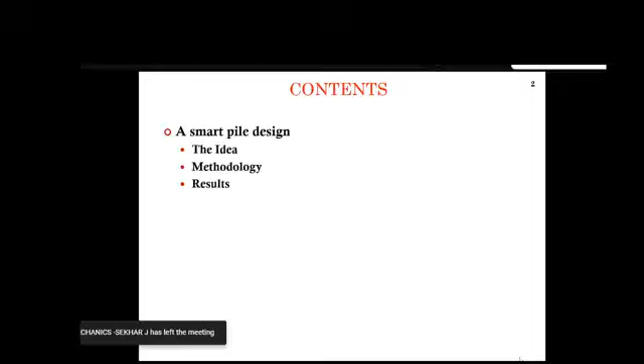Now, going to the topic, these are the contents. I have a smart pile design to propose, the idea, the methodology, the results, and that is part one of my presentation. Now, part two is about stability of finite slopes. It includes stone column supported embankments, a brief study on that, and that is part two.

Before we go into the detailed technical things, I've always found that in FDP workshops, at least the ones that I've presented or been a part of, this will be the expectation, right? You'll have to sit through for, let's say, 1.5 hours. But what really happens would be like this, right? After maybe 45 minutes, we all lose our concentration.

So this is a difference which I've seen during the usual FDPs, the expectations and the realities. Much worse case here, right? If it's an afternoon session, you can expect this. I hope I'm not as boring as I used to be earlier. But what really happens in the online platform could be this, right? When you have the Google Meet with video, you'll be like this. And when you have the Google Meet with audio, you can switch over the mic and the video, and go to sleep. So I'll try to understand that. It's bound to happen even to me, so I can try to understand that.

Let's see what happens now. When the organizers, Nisha ma'am and others, proposed the name of the FDP as smart civil engineering practices to meet the contemporary issues, I was thinking, what is smart, right? What do you really mean by a smart solution?

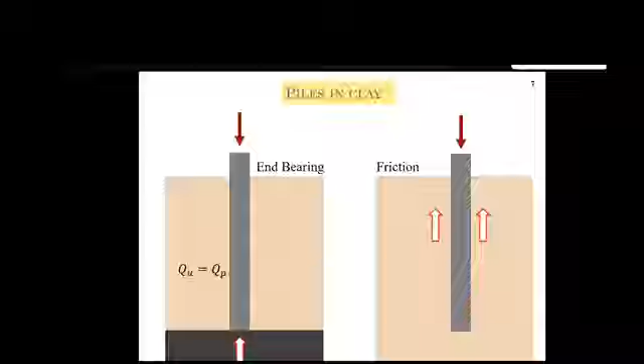Whereas you have skin friction, or friction piles in clay, where you don't expect rock beneath. You'd be forced to install the pile in a clay soil profile where you can't expect rock presence, so you design the pile so that the entire vertical load is taken by skin friction. That's what we call a friction pile. Obviously, there's no completely friction pile or completely end bearing pile - these are all theoretical concepts.

In end bearing piles, QU is equal to QP, QU being the ultimate load and QP being the tip resistance. Whereas in skin friction, QU is equal to QS, meaning the entire vertical load applied onto the pile is taken by the skin friction.

The static method is a theoretical method used to estimate load carrying capacity, where the ultimate failure load QU is the sum of QP and QS. Let's say you have a pile of length L acted upon by QU. That QU is shared by QS and QP - QU equals QP plus QS, where QP is the end bearing resistance and QS is the skin friction.

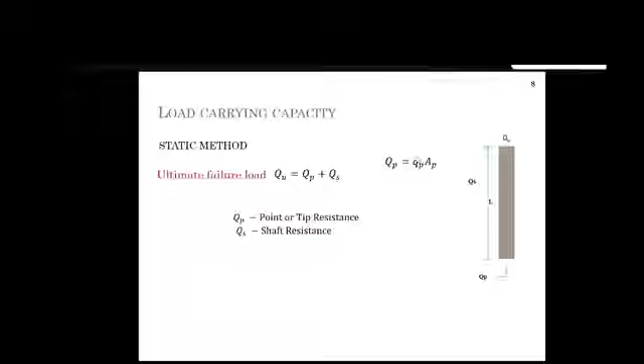QP is the point or tip resistance, and QS is the shaft resistance or skin friction. QP equals small qp multiplied by AP, where small qp is the bearing resistance per unit area, and AP is the cross-sectional area of the pile. QS equals Fs into AS, where Fs is the unit skin friction, possibly due to sand or clay adhesion, and AS is the circumferential area of the pile depending on geometry - for a circular pile it's pi d L, for a square pile it's the perimeter multiplied by the length. So QP is the bearing capacity, AP is the area of the pile tip, Fs is the skin friction or adhesion along the shaft, and AS is the effective circumferential area.

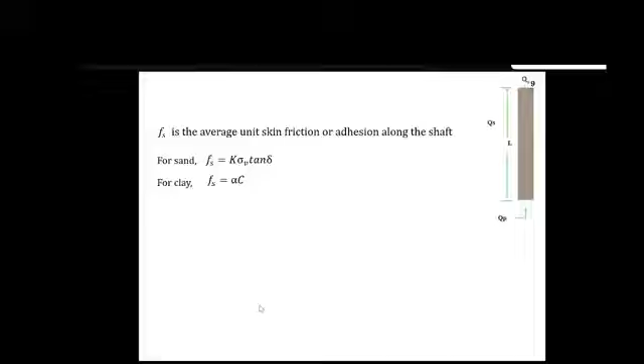For the term Fs, you have two options. If it's sand, Fs equals K into sigma V into tan delta, where K is the lateral earth pressure coefficient, sigma V is the vertical stress, and delta is the angle of interface friction - the internal angle mobilized at the surface between the pile and the soil. When it comes to clay, Fs equals alpha into C, where C is the effective cohesion and alpha is the adhesion factor. So: alpha is the adhesion factor, C is cohesion, delta is the interface friction angle, sigma V is the effective stress, and K is the lateral earth pressure coefficient.

The presence of clay is quite crucial in these two cities - these two cities are hubs of development. We know Kochi is one example, Chennai is another. These cities are hubs of development, but at the same time, most of the soil deposit they have there is clay.

In usual cases, you'll be forced to design the pile in such a way that the entire load is taken by skin friction. You can't expect a rock to be present even if you dig up to, let's say, 20 or 25 meters, and you don't have the luxury of pumping in money to go beyond that depth in some cases. You can't go to infinite depth just to see if there's rock present. So in these conditions, you'll be forced to make the pile stand in such a way that the entire load is taken by the skin friction.

Now, when we talk about that, I'll give you two examples. The normal pile that you have here is called a prismatic pile, which means the cross-section area remains the same. You have a circular cross-section, and it remains the same throughout, unless it's an under-reamed pile.

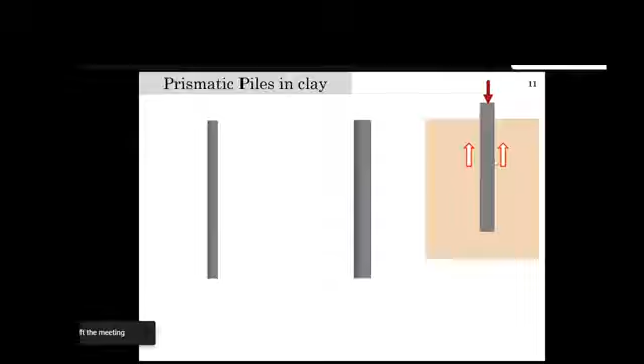Now I can take two examples here. Number one, I have a pile here. Number two, I have a pile of the same length, but with a bigger diameter. Now the first pile, you know that the tip area is less compared to the second, so you can expect less tip resistance. And you have less surface area, so you can expect less skin friction. And you have less volume, so the investment on material cost is also less.

Whereas when you have the same pile with the same length, but with a bigger cross-sectional area, which means a bigger diameter, you can have everything more. You can have more end-bearing area, so you can have more resistance there. You can have more surface area, so you can have more surface friction there. But you'll have to compromise, because the material input is also more.

Now this is where we have the role of under-reamed piles. These are nothing but piles in which the base area is increased by providing a bulb. This is a single under-reamed pile that you see to the left side, where you usually have a bulb diameter of 2.5 times the shaft diameter. And to the right side, you can see a multi-under-reamed pile, or double under-reamed pile as I call it, where you have two bulbs kept at a specific spacing.

So the principle is quite simple. You increase the base area, so you increase the end bearing.

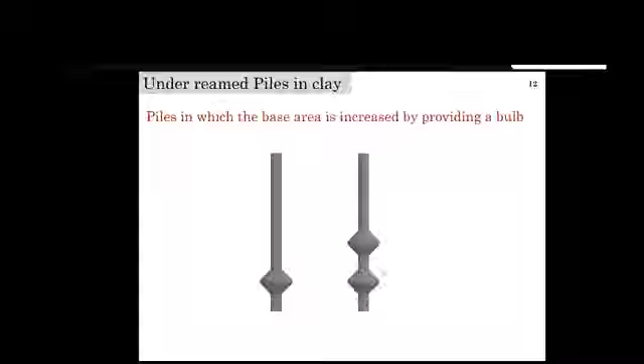When it comes to the theory portion, I've taken a pile with a B shaft diameter and a B1 bulb diameter, and I have cohesion at the pile tip as C, cohesion at the bulb level as C1, and cohesion at the shaft level as C2. Let's say AS is the circumferential area of the shaft.

In such a case, you have point or tip resistance as QP into AP. For clay, you take QP as C into NC — you don't take the three different terms of Terzaghi's equation, you limit everything to C into NC, where NC is taken as 9, usually for deep foundations. NC is the Terzaghi's capacity factor, taken as 9. And for under-reamed piles, AP turns out to be AB, which means the area of the bulb.

Now for shaft resistance, QS is equal to FS into AS, and FS turns out to be alpha into CS, or alpha, the adhesion factor, multiplied by the cohesion.

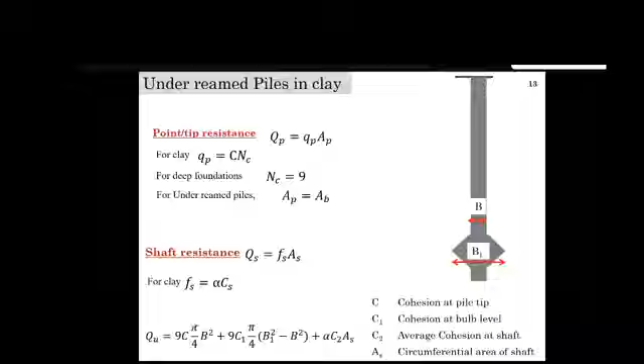When it comes to an under-reamed pile, you have three different terms here compared to the prismatic normal pile. The first term, 9C into pi by 4 B square, is the tip resistance at the shaft. The second term, 9C1 into pi by 4 into B1 square minus B square, is the bearing taken by the bulb level. And the third term, alpha C2 into AS, is the skin friction taken by the shaft.

So for a single under-reamed pile, you have the option to estimate the ultimate capacity using this equation. Whereas for a multi-under-reamed pile, with more than one bulb, the logic is deceptively simple — you have two things here. Number one is the point resistance, same as before, 9C into pi by 4 into B square, plus the end bearing at the bulb.

And the shaft friction is a bit complicated here. It's not distributed entirely along the length, instead it's distributed along the shaft, because you have a bulb here and a bulb below that, so you can't write that same equation there.

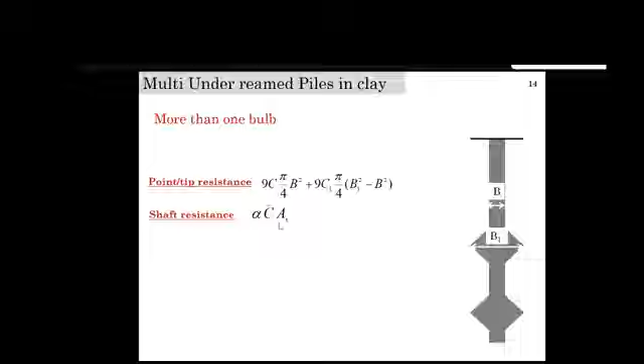So alpha c into As is the shaft resistance, but the space between these two bulbs, you have a different phenomenon there, because when you try to squeeze this pile down, what really happens is that the soil between these two bulbs will tend to move along with the pile. Which means it acts as a part of the pile.

So here you have what we call a circumscribing cylinder of soil, which means you have the soil in a cylindrical form that circumscribes these two bulbs. So when you consider that into account to calculate the ultimate bearing capacity, I have a different term called CA into ASB, which means the entire pile's capacity can be calculated by not three terms, but four terms.

The first term is the usual term that we have seen earlier for a single under-ream pile. Second is again the same thing, the bearing at the bulb level. Third, alpha c into AS is the shaft friction at the shaft. Whereas the fourth term, you don't have alpha, instead you have C into ASB, where ASB is a circumferential area of the cylinder.

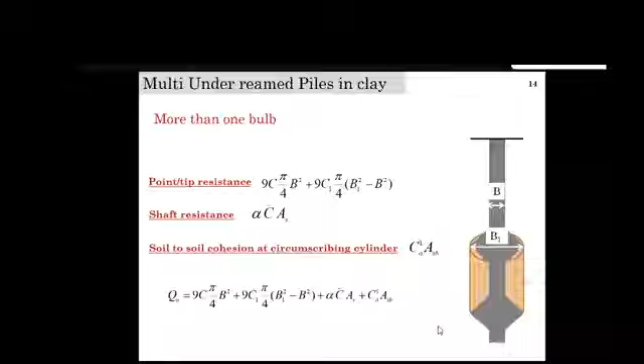Now just believe that the cylinder is not concrete, the cylinder is soil. So you don't have an interface friction here. What you have instead is a soil-to-soil friction. Just imagine you are trying to squeeze this pile into the ground, you're applying a load. So this soil will act as a unit of the pile. So the friction that's mobilized is along the soil-to-soil interaction and not at the pile-to-soil interaction. Now that is a key point that we're interested in.

And ASB is the surface area of the imaginary cylinder. Of course, it's imaginary, and it's circumscribing the bulbs. And CA dash is the average cohesion at that level.

So to put the long story short, you have QU is equal to the first term, which is the shaft tip resistance. Second term, you have the bulb tip resistance. Third term, you have the shaft friction resistance. And the fourth term is a cylindrical soil-to-soil resistance. So this happens in a double under-ream pile. You don't have the fourth term in a single under-ream pile. Now this is a key point that we are interested in.

Now, literature survey, as this, by the way, was part of an IICT-funded project, which was carried out a few years back. So a few literature surveys were carried out to understand the mechanism of under-ream pile with two bulbs or more. And we found out that the best literature that we have is this.

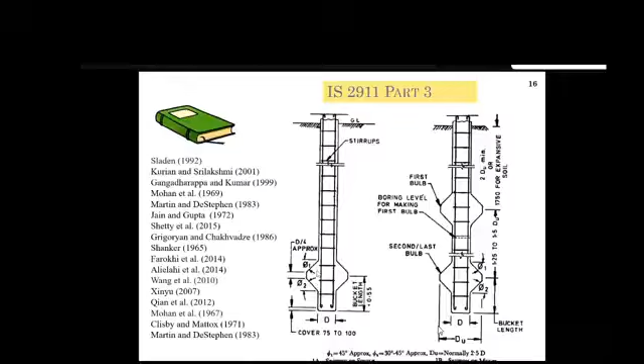Indian Standard 2911 Part 3, IS code for pile. And you can see the dimensions they have marked here, suggesting at what depth the bulb should be placed and the angle at which the bulb should be cut, etc. Now, to the right side, you can see a double under-ream pile. We'll focus on that. In the double under-ream pile, the code says that the diameter is D and the bulb diameter is DU.

And if the bulb diameter is DU, the spacing between these two bulbs is always good to have in the range of 1.25 to 1.5 DU, which means if you have the bulb diameter to be 1 meter, the distance between these two bulbs would probably be around, let's say, 1.2 meter.

Now, that's the literature survey part. Now, based on that, we came up with a design which we think is smart, and that's, of course, there's a scope for criticism, by the way. The prismatic pile is shown to the left side. You have a bigger prismatic pile, of a bigger diameter or a bigger radius. The third option is to have a single under-ream pile.

And the fourth option is to have a double under-ream pile. And the proposed pile would look like this. This is our target pile, which means you have more than 2 bulbs, but the bulb diameter is not as big as the conventional ones that we have.

In the conventional one, the bulb diameter, let's say for an example, if you have a shaft diameter of 30 centimeter, the bulb diameter would be around 70, 80 centimeters. Whereas in the proposed pile, when you have a shaft diameter of 30 centimeter, you don't have a big bulb. Instead, you have a small bulb of 50 centimeter, just an example. But the number of bulbs is not limited to 2. Instead, you have it almost distributed along the length of the shaft.

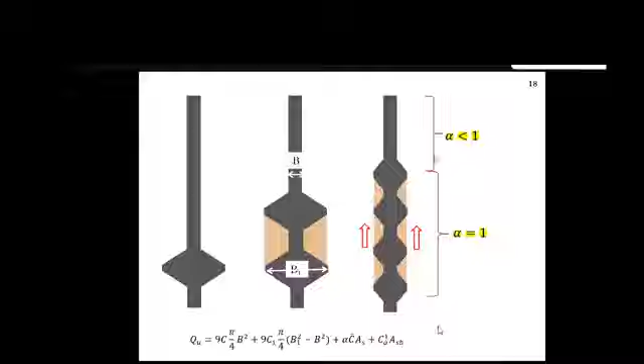Now, in the figure here, I've taken B as the shaft diameter of the smaller pile, B1 as the shaft diameter of the bigger pile, and we have the new pile with the shaft diameter B, the same B, with the bulb diameter B1. This means you don't invest the same volume of concrete as in the prismatic pile - the only increase in volume is at the bulb. These areas are the only increase in material input.

An anticipatory caveat is that this is not applicable in sand. When there's clay with a cohesion of around 30 kPa to 40 or 50 kPa, and if it's stiff, this pile is applicable, because you need to make sure that once you cut the bulb inside the hole, it should stand on its own. It should not collapse. So this under-ream pile is applicable only to clay soil.

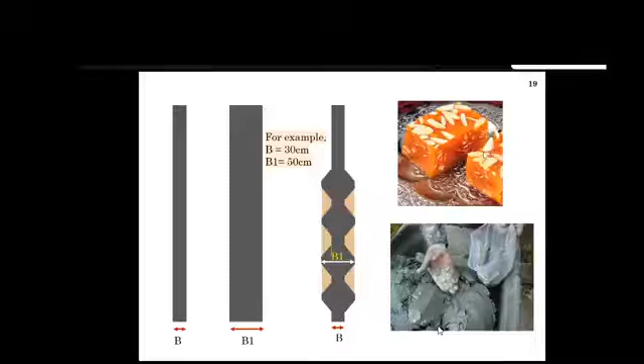I used to compare this to a halwa. Any under-ream pile can be made practical and feasible when the clay consistency resembles the normal halwa that we use. Otherwise, out in the field, the cavity tends to cave in, so you can't expect the same geometry. You can claim you've constructed the under-ream pile, but the cavity may have caved in, and you won't really have that geometry unless you have this kind of clay where you can cut the proper bulb.

The example I've taken is a B of 30 centimeters, meaning the slender pile is 30 centimeters, and B1 is 50 centimeters. So the proposed pile will have a shaft diameter of 30 centimeters with a bulb diameter of 50 centimeters, in contrast to the 80 centimeter range we have in practice.

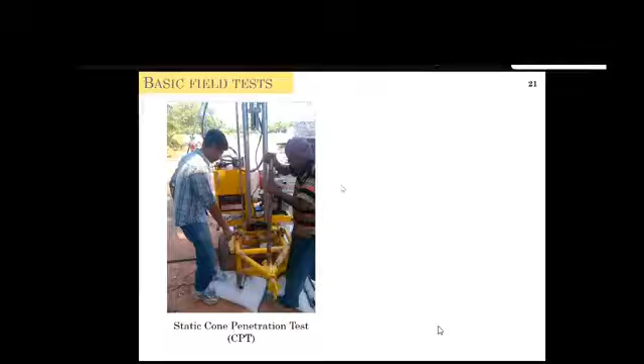The methodology, like I said, has two things: one is experimental investigation, and second is numerical investigation. For experimental investigation, we took a site in Cochin, because Kochi is quite famous for Cochin marine clay. Basic standard tests were done at the site.

Based on these tests, you can estimate the range of cohesive strength in the field. SPT, standard penetration test, and dynamic CPT, DCPT, were also done. DCPT isn't really a necessity, but we kept it as an option in case some other test failed to provide good results. So these four tests were carried out to estimate the soil properties: standard penetration test, dynamic cone penetration test, static cone penetration test, and vane shear test.

Now we casted the piles. For comparison, we had 5 or 6 piles casted. The first two piles are nothing but the conventional piles - the prismatic one, no big complication, just simple piles.

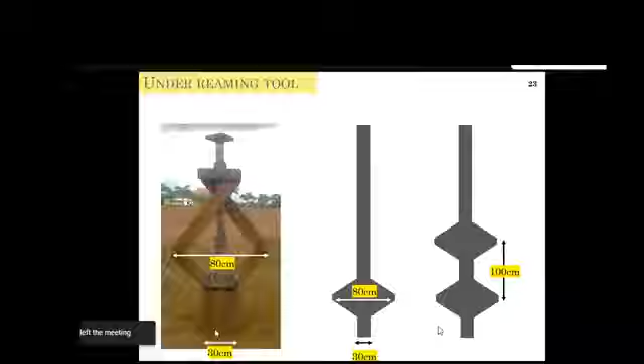Now, when it comes to casting under-ream piles, this is the usual under-reaming tool that we use inside - this is just a photograph I had taken. Now the diameter is marked here: 30 centimeters is the diameter, which means you'll get a pile of 30 centimeter diameter casted. Now, 80 centimeters is the diameter of the bulb. This dimension is as per the Indian standard codes.

IS 2911 Part 3 specifies this dimension, the usual underream dimension. So once you employ this underreaming tool at site, what you get is this: a 30 centimeter shaft and an 80 centimeter bulb. That's a single underream pile.

The same thing applies here as well. You have a double underream pile with the same geometry: 30 centimeter shaft diameter, 80 centimeter bulb diameter, and a spacing of 100 centimeter. This means you dig a hole down to the bottom, employ this underreaming tool, cut the bottom bulb, raise the tool upward, cut the next bulb, and lift the soil up. Once the casting is done, you can expect the pile to be of this geometry.

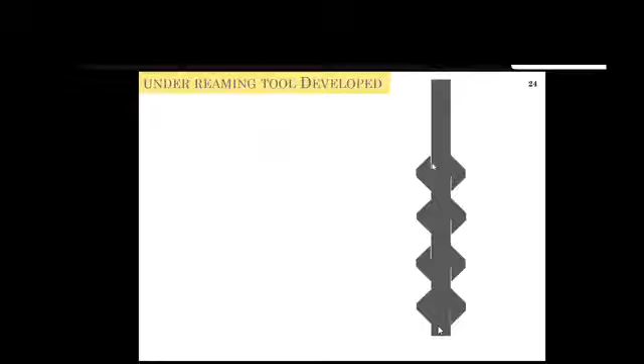Now that's a usual underreaming tool in practice in the industry. But when it comes to our underreaming tool, this is a proposed pile design. So we need to develop something suitable for this pile design. You don't have to go for 80 centimeter diameter; instead, you have to limit it to 50 centimeter.

Plus, your number of bulbs is not limited to 1 or 2. Instead, it can go all the way up to 5 or 6, depending on the length of the pile. So 30 and 50 here, and based on that, we devised a new underreaming tool.

The prototype is just shown here; it's not a field model, just a prototype. So when at rest, it looks like this, just like an umbrella mechanism. When you jack a rod at the top, it kind of turns to this shape.

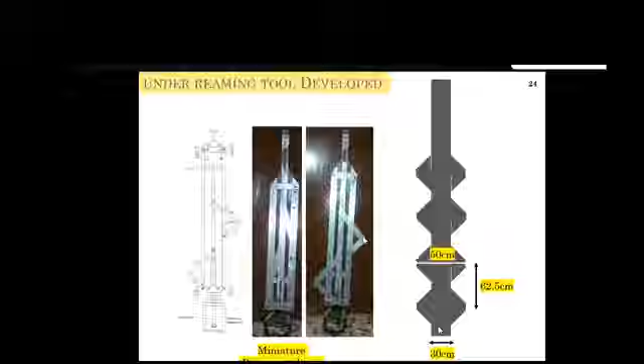So I can cut 2 bulbs here, the spacing of which can be designed, the diameter of which can be designed. So what I can fundamentally do is lower this into the soil. By the way, this is just a prototype design. I can apply a force on the top.

So these wing kind of mechanisms go into the soil, and if I rotate it, I'll get a bulb. So you lower it, jack it down, and rotate it. What you get is something like this, a new pile design.

And we fixed the diameter to 30 centimeter shaft and 50 centimeter bulb at a spacing of 62.5 centimeter.

Now, the field procedure includes any other practical applications of pile casting. You take a borehole, you lower the reinforcement cage. This is nothing but the details of the reinforcement cage, and then you cast the pile.

So you can see in the field there's a line of piles being casted here. One was a prismatic pile of 30 centimeter. Another one was 50 centimeter. Then you have a single underream pile. Then you have a double underream pile.

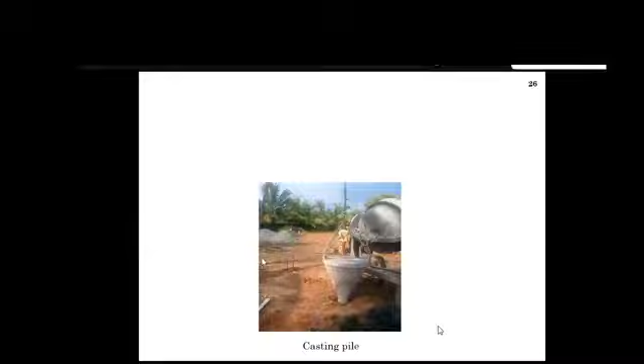And though it doesn't fall into the picture, there's another pile, which is a new pile method that we have proposed. So you have 5 piles in number aligned in a single line, onto which we are trying to have a pile load test done.

So the piles were casted at site, and these are the specifications, the volume of concrete consumed. Take a look at this. Now, the normal pile of 30 centimeter diameter consumed 0.318 cubic meters of concrete, whereas when you have a 50 centimeter diameter, the volume escalates almost up to 2.5 times, 0.883 cubic meters.

But the new pile is just around the same volume. You have the 30 centimeter pile consuming 0.318 cubic meters, whereas the new pile just consumes around 0.375 cubic meters. This means the volume of material input is quite comparable to the 30 centimeter pile, and that will turn out to be an advantage.

Now, like I said, everything that you talk about in the design office might not get implemented in the practical application. So to ensure that our proposed pile has gone up to the design depth, we carried out a sonic pile integrity test. It's a low strain test that we do to ensure that the pile has gone deeper to the depth that we have proposed.

The PIT test was carried out, and the pile load test was done. This is just a photograph of the site where you can see the pile load testing being carried out.

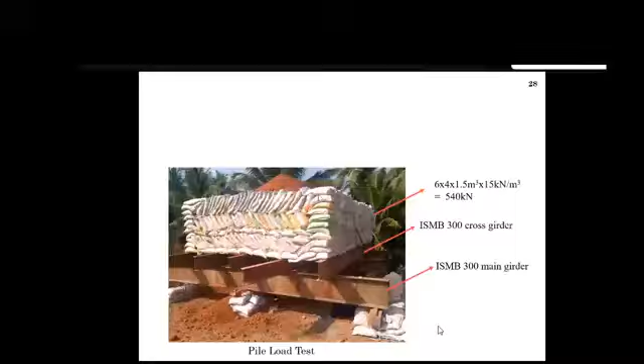One, it's 2/3 of the final load at which the total displacement is 12 millimeter. Two, 50% of the final load at which the total displacement is 10% of the pile diameter. So when you have a 30 centimeter diameter pile, you have 3 centimeter displacement. So whatever load that corresponds to 3 centimeter, you take the half. So these are the pile code specifications about the safe load criteria.

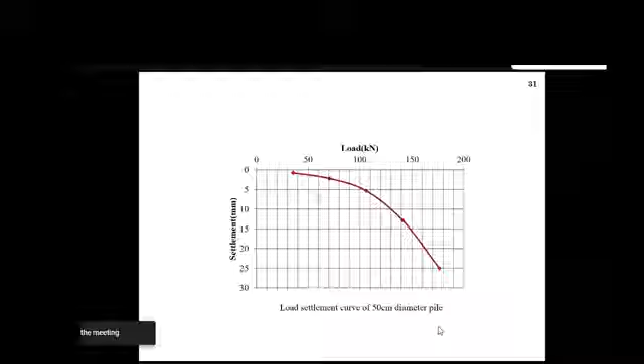P 0.3 means that you have the conventional pile, 30 centimeter diameter, 4.5 meter length. Now, that carried a load of 93 kilonewton, whereas a 50 centimeter diameter pile, same length, 4.5 meter into the ground, carried around 150 kilonewton, or 15 tons.

Whereas the new pile that we have proposed, which has a shaft diameter of 0.3 and a bulb diameter of 0.5, carried almost around 142 kilonewtons, comparable to the 50 centimeter diameter pile. So just think of this: you have the load which is comparable to the 50 centimeter diameter pile, but you have the material input comparable to the 30 centimeter diameter pile.

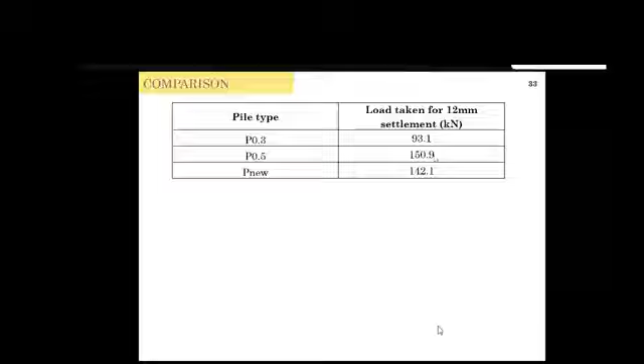Of course, this happens only in clay, which is listed here. The percentage increase in load carrying capacity is listed here, and the percentage increase in volume is listed here. So compared to 30 centimeter diameter pile, 50 centimeter diameter pile shows 57% increase in load carrying capacity, but that comes with a compromise of 177% increase in volume.

Whereas the new pile gives almost 58%. I mean, these results are sample results, I should admit. There were a few other tests carried out, so it averages out to 58% at a material increase input of just 18%, which means you can have an economical result from the new pile design.

Now, this is almost the same table. These are the geometries of pile tested. I have A, B, C, D, and E there. A is 30 centimeter conventional pile. B is 50 centimeter conventional pile. C is a single underreamed pile. D is a double underreamed pile. And E is a new proposed pile.

So the percentage increase in load carrying capacity is listed here, and the percentage increase in volume of material is also listed here. I've highlighted these two things, 177 and 18.87%, discussed in the previous slide, which means when you have B, a conventional pile, 50 centimeter diameter, you have 57% increase in load carrying capacity at 177% increase in volume. Whereas when you take a look at pile type E, you get 58% load carrying capacity at just an increase of 18.87% of material input.

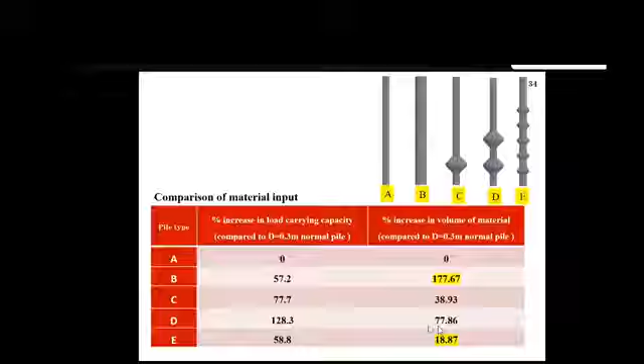Now, people who are working in the field would probably resonate with my opinion that let's say 1 meter cube of concrete would cost you around 10,000 to 12,000 rupees if it's not reinforced. So reinforced concrete can go all the way up to 17,000 rupees per meter cube, including the contractor's profit. So when you have this difference in material input, it's a huge difference in economy. That's a key point that we'd like to stress.

Now, part 2 is the methodology in the numerical investigation. Just to rewind, we have done the field test. We have taken the soil parameters based on static CPT, the dynamic CPT, the SPT, and the lab tests were carried out, etc. And we have the actual data of the load test in hand as well.

Like I said in the introduction, that is not really smart, because when you think of the actual expense of the experiment that you have done in the field, it was around 1.5 lakh, maybe more, maybe north of 1.8 lakhs, including the pile load test. So it's not really smart because you can't play around with different geometries there. So you have a smart solution of numerical investigation.

Now, why not conventional analysis? Part 1 is that conventional analysis is expensive. Like I said, the test took a toll of around 1.8 lakhs on our pockets. So we don't have to play around with much geometries there.

Other reasons why we don't go for conventional analysis: as civil engineers, we do have assumptions. We assume the soil is homogeneous, isotropic, elastic, and semi-infinite. These are the usual culprits, the assumptions, that creep into any theory.

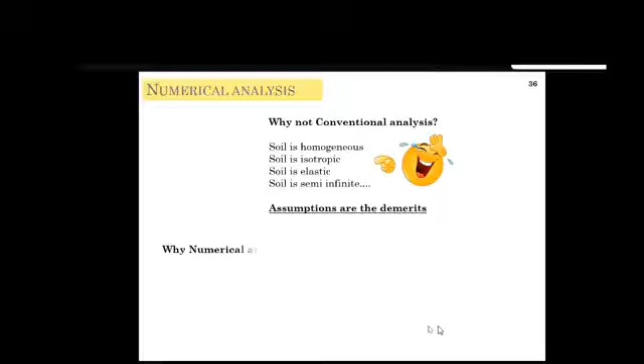So why numerical analysis? To understand the mechanism of load transfer, because in the field you can't see what really happens inside the soil. You don't have the option to dig the soil and see what happens when the load is being transferred. So for us to understand the mechanism, numerical analysis is good.

Second, you can expand and augment the spectrum of investigation. Like I said, we limited our field studies to 5 different piles due to economic constraints. But with numerical analysis you have the luxury of augmenting the spectrum, playing around with different parameters. That flexibility is involved - definitely a smart solution in line with your FDP's title.

The software was Plaxis 2D - 3D was also carried out, we'll go into that later. Every pile we considered as geometry is an axisymmetric problem. You can cut it in half and model the first half, and whatever result you get is representative of the pile. So that's an axisymmetric problem.

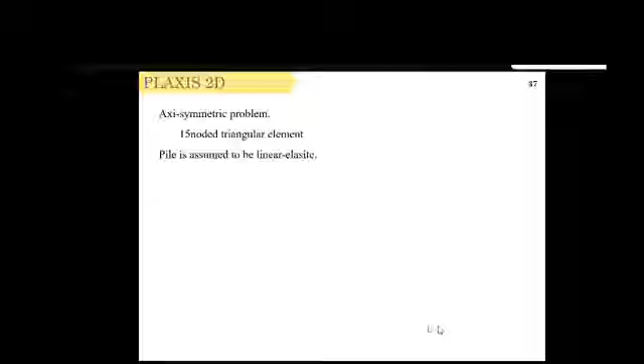You take 15-noded triangular elements, and the pile is assumed linear elastic concrete. The soil is assumed as Mohr-Coulomb model. You do have different models available, but Mohr-Coulomb is the best and easiest model. There are better models, but to estimate and input the soil parameters, MC model is the best.

How do you get the input parameters? You have the disturbed soil sample from the SPT test, plus UDS sampling tubes inserted into the soil. You take the UDS undisturbed sample to the lab, extrude it, then carry out whichever test you prefer - triaxial test to determine shear parameters, or Casagrande's experimental procedure to get the liquid limit, plastic limit, etc. So the UDS sample is taken to the lab, extruded, then carried to the triaxial test chamber, and you get the input parameters.

The input parameters are: number one, E, Young's modulus of soil; number two, C, cohesion of the soil; then internal friction phi; then unit weight gamma; then dilatancy angle. So you can estimate almost every parameter based on the undisturbed soil sample carried to the lab.

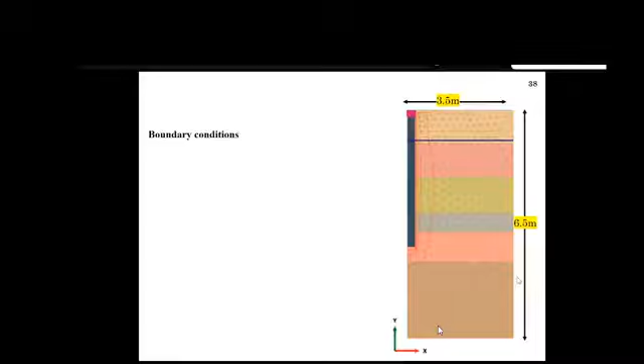Now the boundary condition - since this is an axisymmetric problem, you have half of the pile cut to the right side, meaning the soil volume is double what you see on screen. 4.5 meters was the pile length. The boundary was chosen such that the failure falls within it - 3.5 meters to the right side, 6.5 in some experiments, and up to 10 meters in others. This is a representative soil model used in Plaxis 2D, with 3.5 by 6.5 meters as the geometry.

Rigid boundary means you don't allow soil to settle beyond the bottom boundary, but it's allowed to settle - the left and right boundaries act as roller supports. People working with finite element analysis would probably know these standard fixities: the bottom is fixed, but the sides are rollers. The same standard fixity gets applied here.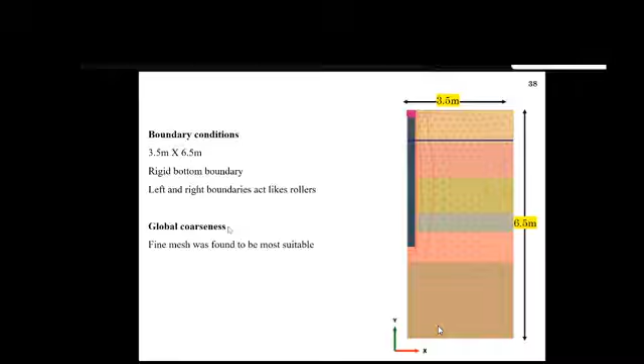The global coarseness parameter had different options - coarse mesh, very coarse mesh, medium, fine, very fine, etc. The finer the mesh, the more accurate the expected results, but the finer the mesh, the longer it takes for the computer to run the program and return the results.

After a few trial and error methods, we found that the fine mesh, which falls in between very fine and medium, was quite normal. It gave satisfactory results and was suitable. Now, with one exception, in areas where the stresses are large, you can have the option of mesh refinement. But I'm not sure if this gets applied to the latest version of Plaxis. It used to be the case earlier that you had an option to refine the meshes there.

So the mesh refinements were done, and these are the steps. This is the geometry, by the way: 4.5 meter, 30 centimeter diameter first one, 50 centimeter second diameter, with the 80 bulb there, double underream pile there, and the new pile design there.

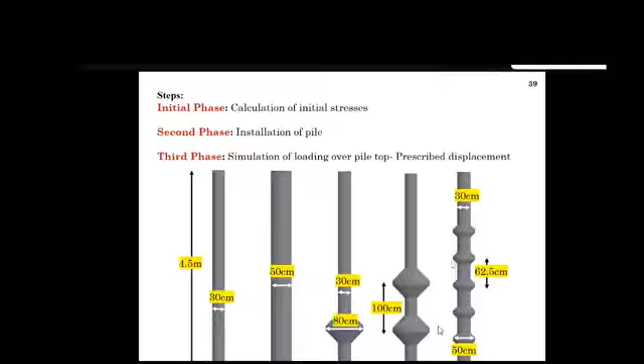So these analyses were run, and these are the steps. You have the initial phase, the calculation of initial stresses. Second phase is the installation of pile, and the third phase is the simulation of loading, by a prescribed displacement, which means you apply a displacement onto the pile equivalent to the displacement suggested by IS 2911.

The circumscribing soil cylinder mobilizes alpha equal to 1, which means along this line of soil connecting these two bulbs, you don't have interface friction between concrete and the soil. Instead, what you have is soil-to-soil adhesion. So that behavior gets reflected in the Plaxis analysis as well.

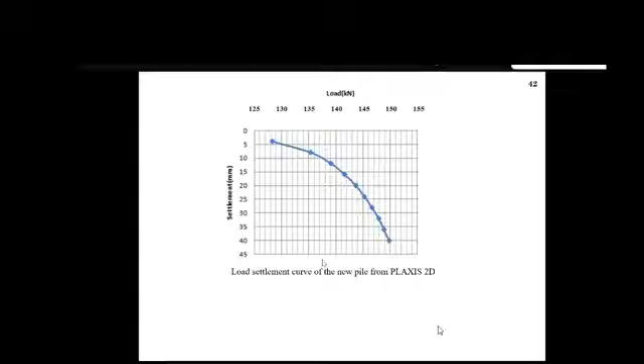Now, just a representative load deformation criteria from the Plaxis 2D, and this is a comparison of the load capacity. The same notation A, B, C, D, E I've written there: conventional, underream, double underream, to the new proposed pile. Comparison from Plaxis shows the same thing. When you have E, the new pile design we propose, it gives around 58% increase. Whereas for B, it gives around 57% increase in load carrying capacity, almost in sync with the load test results that we got from the field.

Now, comparison with the load test: you can see A, B, C, D, E listed here, but I've limited it to A, B, and E because that's what we're interested in. We are no longer interested in underream piles any longer. So A, B, and E shows that the percentage increase turns out to be around 61% for the 50 centimeter diameter pile, whereas it's around 57% for the new pile, for the Plaxis-based analysis.

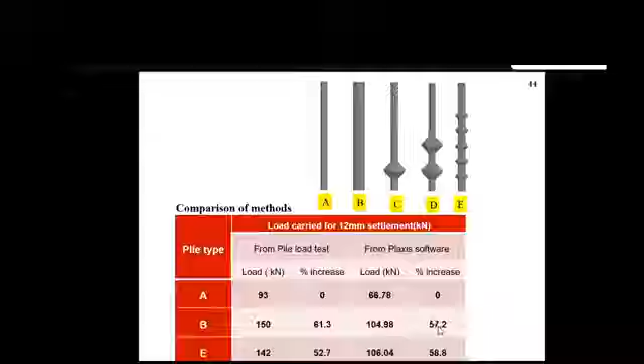Whereas for the field comparison listed there: 61 is here, 57 is here, and you can have 52 there and 58 there. Which means the analysis results of Plaxis are almost representative within the tolerance level with the pile load tested in the field.

Now, again, once we have the model validated, you can play around with different combinations. I've tried playing with the spacing there, just a sample representation of the image I've put here. I've tried the 1 DU spacing, 1.25 DU spacing given by the code, 1.5, and it goes all the way up to 2.5 DU spacing, where the spacing between the bulbs is 2.5 times the bulb diameter. Even in that case, you can see that the load taken for 12 millimeter settlement is at the peak when the bulb spacing is around 1.25 to 1.5 times the bulb diameter. This is the cusp of the graph, meaning the maximum load is taken at 1.25 to 1.5 spacing.

So at lower spacing, you can't expect much higher capacity. Even at higher spacing, this was done at a cohesion of 20 kilopascal.

So the long story in short, we can say that the IS 2911 specification of 1.25 to 1.5 diameter spacing seems to be quite logical, right?

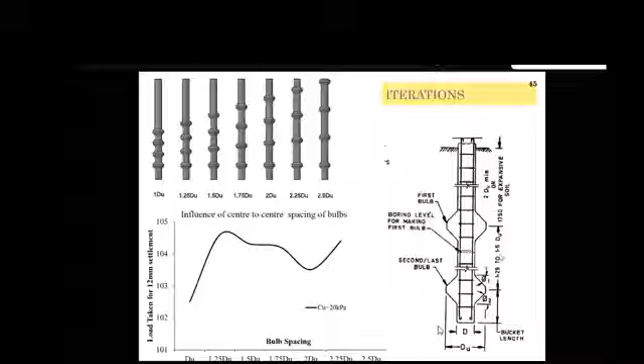Just to augment the spectrum of analysis, we try to extend that to Plaxis 3D as well. Same soil model, Mohr-Coulomb, almost the same things we've done, except that in 2D it's axisymmetry in geometry. Same boundary conditions, fixed at the bottom and allowed to move in the roller direction. Input parameters were the same. Same steps: calculation of initial stresses, installation of pile, and simulation of loading over the top.

Now CAD software is used to model that, and the model was imported to Plaxis 3D and looks like this. This is a double underream pile, by the way, not the pile design that we have proposed. Nonetheless, the procedure remains the same. So the CAD model gets imported to Plaxis 3D.

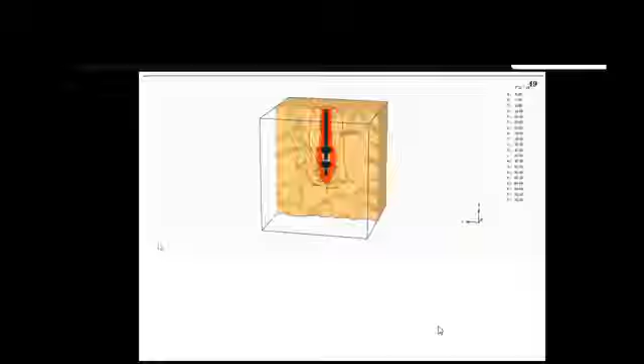You have the underream pile there, double underream pile. You apply the load, and this deformation pattern seems to be like this. Again, you can see that the deformation pattern is not going into the soil between the bulbs. Instead, it tries to form a circumscribing cylinder there. I'll repeat that video - you have the pile installed, you load the pile.

Usually I tend to insert these videos thinking that those who are sleeping in any class tend to get attentive during a video presentation. I was just trying my luck on that, but when you have that kept on a figure, it looks like this.

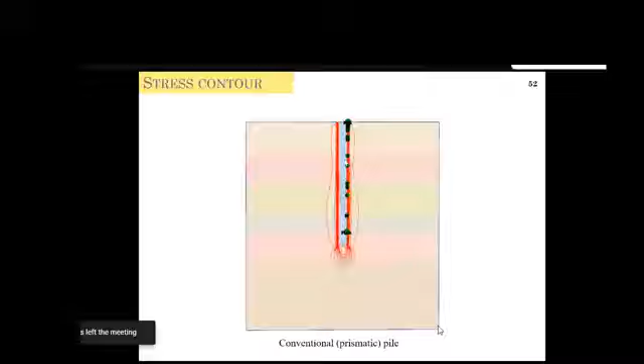The stress contour of a prismatic, the conventional pile, would look like this. You can see these lines go all the way up to the top without much difference, up to 4.5 meter ground level. This is a prismatic pile, which doesn't have a bulb.

Whereas for our new pile, of the same shaft diameter but with a few bulbs peppered into the shaft, it gives a deformation contour like this - quite the same thing you have seen in the video, if you've seen that. The stress contours try to circumscribe these bulbs and go all the way up to the top.

The final comparison is like this. The material input is quite low in our case, whereas you get a higher capacity.

Based on the pile load test, you get 93 kilonewton here. In Plaxis, it gives you 66. In 3D, it gives you 89. 150 here, 105 here, 120. And the percentage increase in load capacity is also given there.

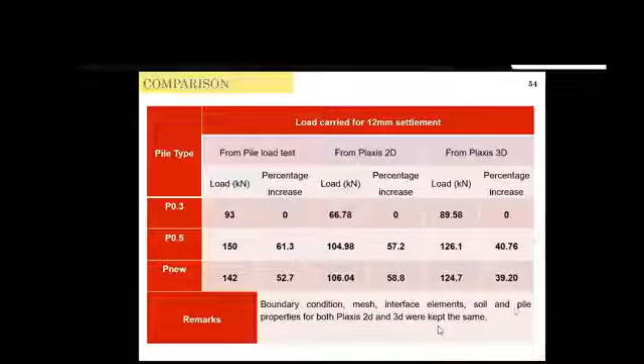I'd like your attention to the last column. It says that the percentage increase in load carrying capacity is 40% in case of a conventional pile, which, by the way, has a 177% increase in volume, whereas in the new pile it almost gets up to 40% at an extra volume of just 18%. So what you fundamentally get is a higher capacity pile with a lower cost.

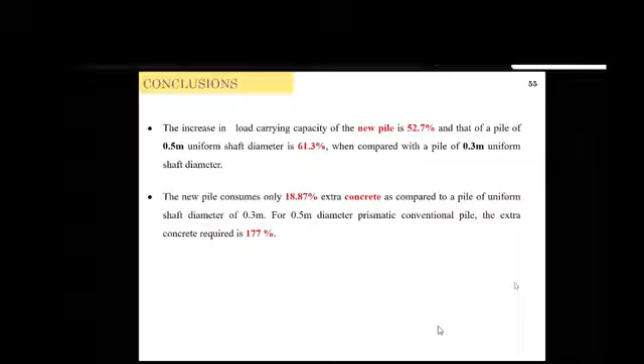And again, for the sake of comparison, we can see that the value obtained from the Plaxis analysis and the pile load test is almost showing the same trend.

The last conclusion can be that the Indian Standard 2911 specification of keeping the spacing between 1.25 to 1.5 seems to be logical, right? You were able to mobilize the frictional capacity when you kept the spacing at 1.25.

Again, from the conclusion, the phenomenon is quite simple. At a lesser increase in concrete, you get a higher capacity due to the fact that alpha, the adhesion factor, is 1, right? That's a key takeaway.

Now, like I said, when you talk about theory you should talk about the limitation. The limitation, at least the one that I know, is that it's applicable just to clay. Like I said in the first few slides, it should be halwa, it should be self-standing. If it's a halwa consistency, it can have this underream pile cut in the proper geometry. Whereas it's definitely not applicable otherwise.

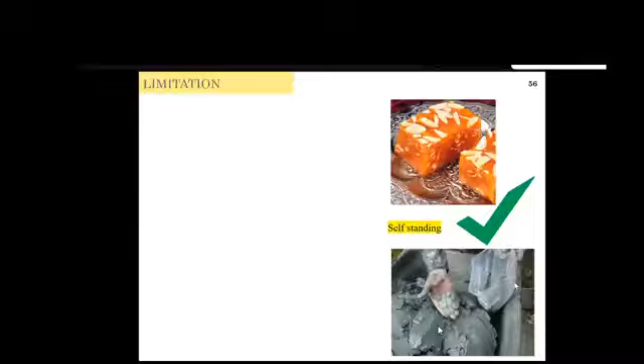Anyone who thinks it would be applicable to sand would be foolish enough to think that way, because sand never stands on its own. Even if it's confined to a depth of, let's say, 4.5 meters, you can't expect sand to stand on its own when you have a cavity of 80 centimeters. So your criteria is to have self-standing soil, a clayey soil, to cut the bulb, and not a mixture. We need halwa and not the mixture, because in halwa you can have self-standing soil, but in a mixture you don't have self-standing soil—you can expect the cavity to collapse.

Part 2 is the stability of a finite slope. I should admit that this is not related to the first part that we've discussed—the first part is about pile capacity, the second part is about the stability of a finite slope. Again, this is something which I thought was a smart solution.

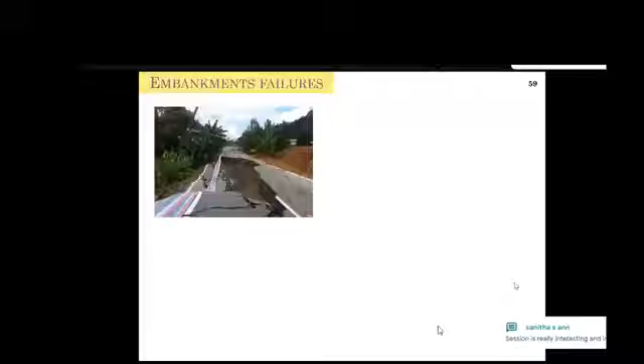Now, embankment failures is where we try to focus on slope stability. You can see to the left side a picture of an embankment which failed due to deep-seated failure, which means it's something related to slope stability. Of course, embankments are constructed on slopes—embankments are artificially made slopes. So whatever slope stability analysis we can propose gets applied to embankments as well.

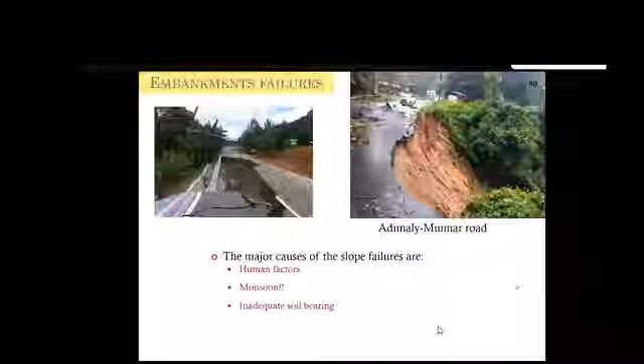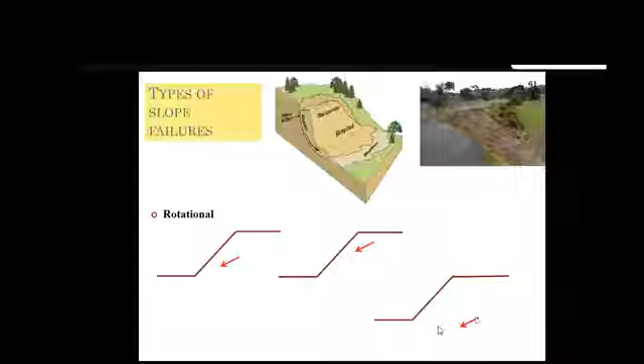Now, when it comes to embankments, like I said, it's nothing but a slope. You can define the theories associated with slopes and try to associate that with the embankments as well. So slopes tend to fail in this direction usually.

It can be defined as rotational failure. Rotational can be like this, or it can be like this. It can be toe failure, it can be slope failure, or it can be base failure.

Or it can be translational failure as well. Translational failure means that you don't have the failure surface represented by a part of a circle, and for the same reason you can't apply a radius there. Instead, you have a parallel plane there. It tries to fail along a plane parallel to the original ground. So that's a translational failure.

And you have a compound failure there. It's a combination, as the word suggests, of the rotational, initially a rotation, and then a translational. And then you have the wedge failure, which means the failure would look like a wedge. So that's a wedge failure.

Now, theory is basically the balancing act, I'd say, of the resisting force and the driving force. So slope instabilities are balancing acts. Resisting force prevents failure, and driving force promotes failure.

And like we said, the usual resisting force is the shear strength of the clay, of the soil, and the driving force which promotes the failure is usually the gravity and the water. So the balancing act gets upset when you have slope instability. When the force which promotes the failure, which drives the failure, gets above the one that prevents the failure, you can definitely expect slope instability. So that's a fundamental thing.

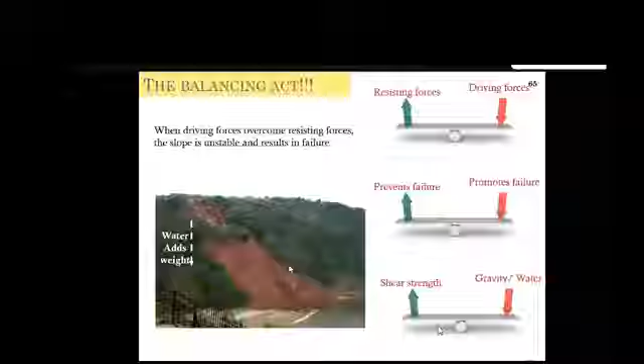Now, water has two actions on slope instability. One is water adds to the weight. When you have a unit weight of soil of, let's say, 18 kilonewton per meter cube, when water gets added to that, depending on the voids ratio, it can go all the way up to 21 kilonewton per meter cube. So 18 gets increased to 21. So it definitely increases the weight of a volume of soil.

Number two is that it erodes the base. When you have a slope constructed, water, number one, adds the self weight, which promotes the failure. Number two, when you have flowing water, it has a tendency to erode the base of the slope.

I have a picture. This picture, this is one desperate attempt from my side to promote myself. We did nothing here, but still we took a picture there.

This is in Bhoothathankettu. What really happened here, I believe, was that water tried to erode. I'm not sure if you can see, there's an embankment to the top left corner. Water tried to erode the soil at the base, plus it added water weight. This was two years back during the infamous flood that we had. The Bhoothathankettu Dam site is quite near to that. So the water tried to erode the soil, which decreased the base resistance, and the slope got unstable.

Now, some boring theory, I'll skip that.

For us to analyze, you have phi equals zero analysis for slope stability. People who teach geotechnical engineering would agree that this analysis is limited to clay soil.

There's the Swedish circle analysis, where you cut the slope into different slices and analyze one slice, then put together a rudimentary form of finite element analysis, because you fundamentally cut one, analyze one, and try to stitch everything together. That's the Swedish circle method.

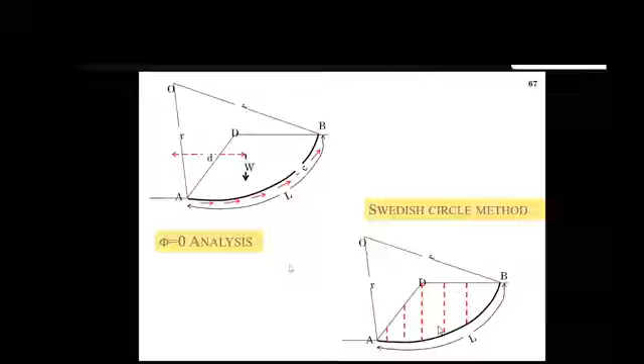Third, you can have the friction circle method, a bit different. You assume there's a friction circle there and the normals are tangential to that circle, etc. So there's the friction circle method.

Then you have the easiest one, the Taylor stability number. Taylor has done everything for us. We just have to look into the charts, get the stability number, and get the factor of safety.

Now, these are just the theory portions.

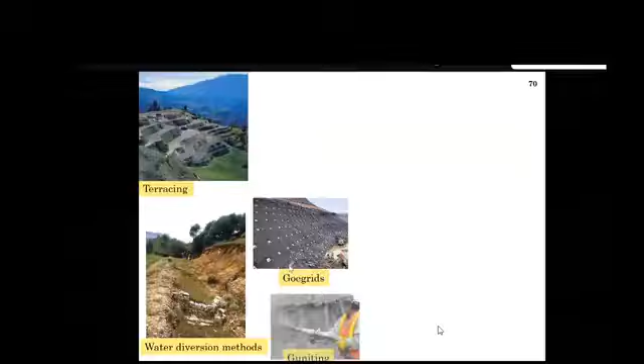And then you have shotcreting, then gabion walls, which again is a slope retaining method. Then you have soil nailed walls, and then you have stone columns.

I've kept the stone column for last because that's the one thing I'd like to discuss if I have the time. Stone columns are another option to stabilize the slope.

Stone columns are nothing but semi-rigid piles, because you're fundamentally following the same principle of installing a pile, either by displacement or replacement method. But instead of concrete, you fill it with aggregates, broken stones.

Partly this is because it enables water to be extracted. If there's consolidation, stone columns act quite like PVDs, allowing water to escape so you can have rapid consolidation. Plus, it can act as a load-carrying structure, quite like a pile foundation. So it comes somewhere in between these two roles.

It's also called a granular pile, used for flexible structures and for liquefaction mitigation. It can be constructed by vibro replacement, vibro displacement, or by ramming.

Now, these are a few landmark applications of stone columns. People who have been to the Gulf countries would identify with this picture of the 7-star hotel there. But it's not the 7-star hotel built with stone columns, instead it's the Palm Jumeirah.

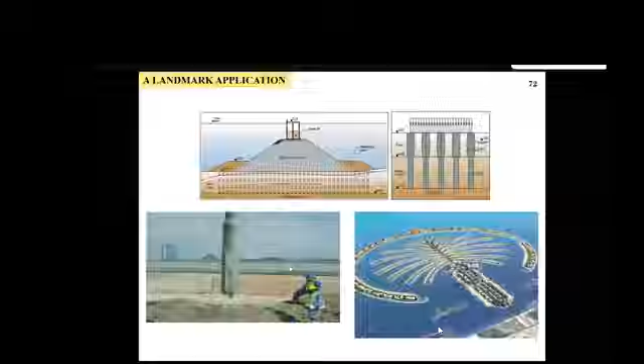So you have the advantage of consolidation plus the advantage of load carrying capacity. The plan arrangements can have a square plan arrangement or a triangular plan arrangement.

So square patterns and triangle patterns, plus the failure mechanism: it can fail by bulging or by settling.

Buckling or bulging - what really happens is that when you apply load onto the stone column, it tries to bulge out, quite similar to the triaxial test. You have a soil cylinder there, and you apply the deviator stress, it tries to bulge out. So that's one type of failure. Or else it can act as a rigid kind of body and settle down. So these are two failure mechanisms.

Encased stone column is a presentation that I've prepared. It just means that instead of just inserting the broken stones into the ground, you really encase them in geosynthetics. The picture at the bottom shows homogeneous soil, which means you don't have anything there. To the right, the second one is a composite. Then you have the semi-rigid, which is the encased stone column. Then you have the rigid, which is the pile.

So encased stone column has a behavior which falls in between the composite stone column and the pile. It's semi-rigid in behavior, which means the chances of it getting bulged out can be minimal. So it confines the stones, it enhances the passive pressure, and you can have longer stone columns, a higher degree of compaction, etc. Increased bearing capacity - these are the advantages proposed when an encasement is given.

Now I've written ESC, encased stone column, or EGC, encased granular column. You'll see these notations in the progress of the slides. Another advantage is that it prevents clogging. When you have usual ordinary stone columns installed, chances are high that they get clogged since you're inserting them into clay. Once it gets clogged, the property of drainage gets affected. So when you have encasement, you can ensure that the drainage for which it is designed is mobilized at the field. Encasement prevents clogging, aids the drainage, and aids the load carrying capacity.

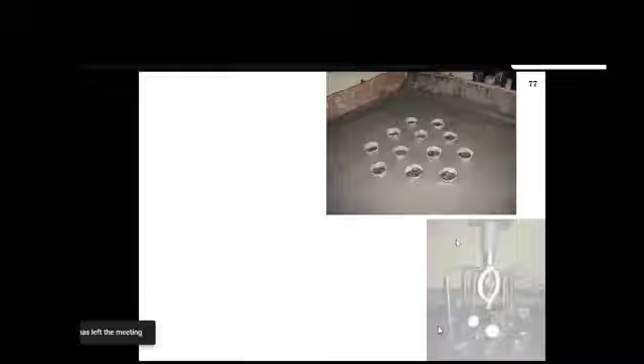Now, when you come to stone column research, a lot of research was done on the axial load capacity. A few researchers involved one single stone column, a few others involved a group of stone columns, etc. But rarely was research carried out subjected to shear loading. Every research we had then was subjected to axial loading, we didn't have shear loading, so that is a research gap. People who have done research would agree that we find a lot of time invested in finding a research gap. So once you get the research gap, the shear loading, you try to understand that.

Now, why are we interested in shear loading on a granular pile? You can see a picture there. Let's assume you have the AC road, Alappuzha-Changanassery road, constructed on an embankment, beneath which you have clay. Since it's spanning between Kuttanad and Changanassery, you can expect nothing but clay there. So when you install stone columns, the ones at the middle of the embankment are largely subjected to vertical loading.

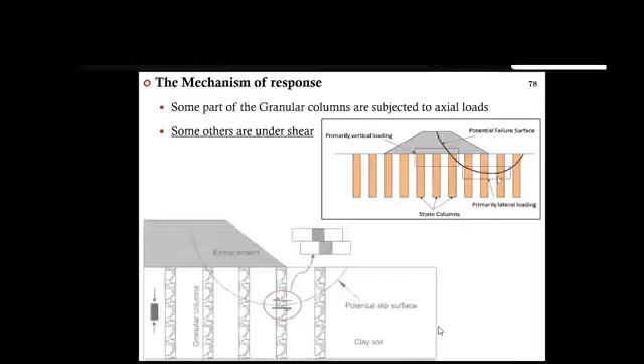To put things in perspective, the circle marked in red shows a case where the slip surface passes through the stone column and induces shear loading, quite similar to a direct shear test. We've zoomed in on this, and it shows that columns toward the toe direction are not predominantly under axial loading, but instead under shear loading. So we need to understand the shear capacity of the stone columns.

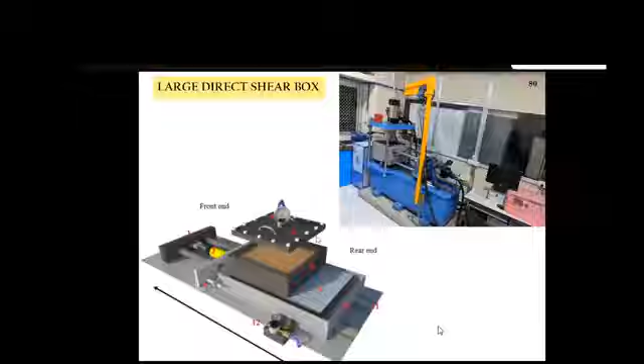A large direct shear box test was carried out with stone columns, with encasement and without encasement, and a few different cases of encasement.

This is the sequence of the experimental procedure. First, place a steel tube inside the direct shear box, then fill sand around it. Next, place and compact the aggregate into the tube, then remove the tube, and what you get is a granular column. This simulates the replacement method - you're not jacking the stone columns in, instead replacing the soil and filling it with stone.

The aim of the study was to quantify the improvement in lateral resistance due to OGC (ordinary granular column) and EGC (encased granular column). Tests were carried out under different confining pressures and normal stresses, ranging from 15 to 75 kPa.

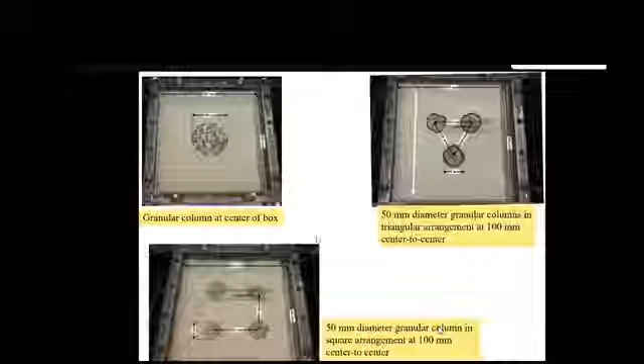OGC means ordinary granular column, and EGC means encased granular column. These are the combinations of tests: number one is a granular column at the center; number two is a granular column set in triangular pattern, 50 millimeter diameter with 100 spacing; number three is a square pattern of the same diameter. So you have single, triangular, and square patterns.

Tests on GC with and without geosynthetic encasement were carried out. I won't detail everything, but here's the test summary: poorly graded fine sand was used with 36 degree friction angle. Granular columns of 50 millimeter and 100 millimeter diameter were used, aggregates were used as stone columns, and three different geosynthetic materials were tested.

Number one is a woven geotextile, marked as E1. Number two is cotton socks, marked E2. Number three is a paper towel, marked E3.

This is the test summary: sand alone was tested, 50 millimeter diameter stone column was tested, 100 millimeter diameter stone column was tested, 50 millimeter in triangular pattern was tested, 50 millimeter in square pattern was tested, and replacing the sand with dense aggregate - meaning the entire box was filled with dense aggregate. These are the iterations that were carried out.

I've kept an acknowledgement to my friend Sunil, from whose journal I've taken these details. These are some of the observations - now, failure mode.

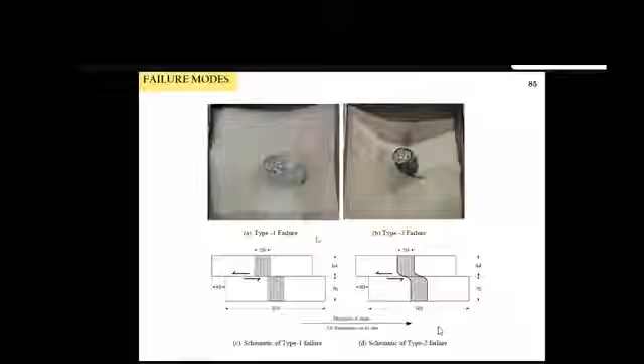When you talk about failure mode, two broad failure modes were seen. Type 1, on the left side, is where the entire thing got sheared off at the predefined failure plane - you're familiar with the direct shear box where you have a predefined failure plane. The box at the bottom moves to one side, and the geosynthetic encasement failed and got torn off. That's failure type 1. Type 2, on the right side, is where it didn't break entirely but bent out and got tilted.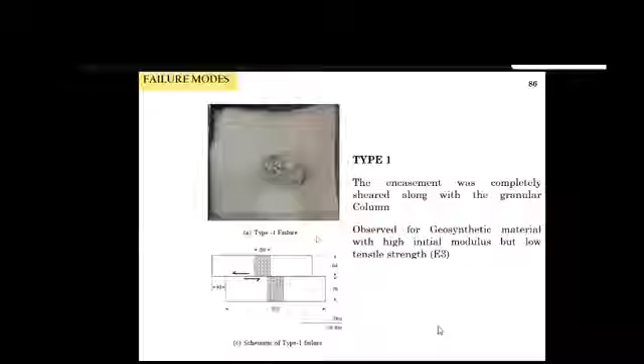Type 1 failure, where it got totally sheared off along the shear direction, was observed when the geosynthetic material had a high initial modulus but low tensile strength - quite intuitive, since low tensile strength means the encasement is more likely to tear off. So E3 material, with lower tensile strength, got sheared off, whereas type 2 was observed for materials with higher tensile strength, which offer resistance against shearing and tend to bend out instead.

The advantage here in type 2 failure is that drainage is one function of a stone column. If the stone column gets totally sheared off, you can't have a continuous drainage path. Whereas when you limit the failure to the second failure mode, you can ensure that even if the load is not entirely taken by the stone column, the drainage is proper. So we actually prefer failure mode 2 in the field, because even if it fails, it at least gives us a drainage path.

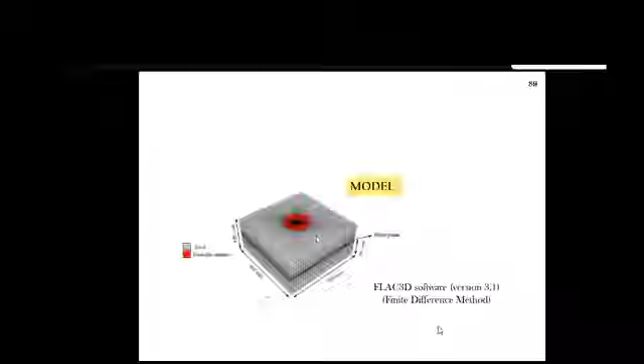Part B methodology is numerical analysis. I've not included the details because we are running short of time. The model was created in FLAC, Fast Lagrangian Analysis of Continuum. FLAC 3D software was used, and SS Mohr-Coulomb was used. Geosynthetic encasement was modeled as a geogrid type shell element, and the computer details are given as well. You had a workstation there to process the volume of data.

Now, these are some of the observations. Again, I'm limiting observations to a few slides here. 50C OGC means that 50 is the diameter, a 50 millimeter diameter stone column. C means it's at the center of the direct shear box. OGC means it's not encased, it's ordinary. So the 50C OGC stress pattern is shown here.

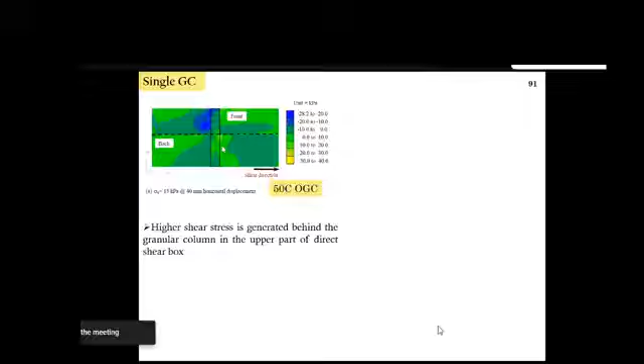It can be seen that higher stresses are generated behind the granular column in the upper part of the direct shear box. Let's imagine what really happens. You have a direct shear box, you move it, the bottom box moves, and it tends to have higher shear stress induced at the portion behind the granular column. This is a case where you don't have encasement. Passive force is generated due to the movement of the granular column. When it tends to move, the rear portion pushes against that, so you have passive force mobilized, which gets generated as stress.

Whereas when you have the same geometry but with encasement, EGC, what really happens is that every stress generated is limited within the column. The stresses are minimal in the surrounding soil inside the box. Highest stresses are generated inside the granular column compared to the surrounding soil, so you're not stressing the surrounding soil, in our case the Alappuzha clay. Instead, the trouble is taken by the geosynthetic encasement, and every stress is limited within that. That's of course an advantage. So the geosynthetic encasement helps mobilize additional stresses internally inside the column.

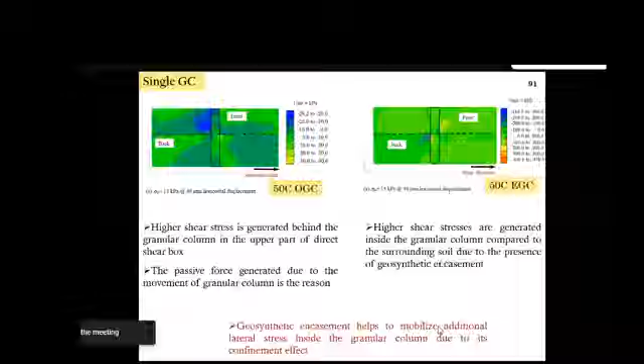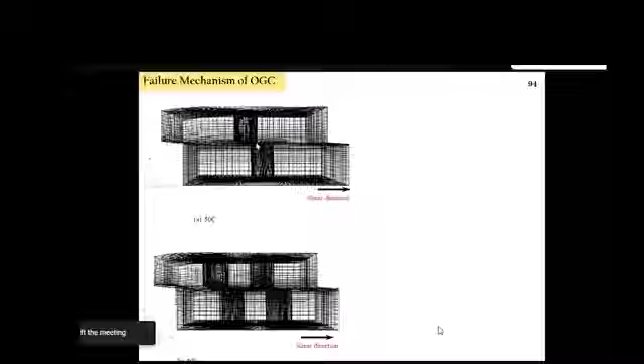This is just the FLAC output where you can visualize the failure pattern. You can see that failure mode 1 is represented here where it completely tears off, and this is the same thing, completely tear off, but in square arrangement. 50C is the first picture, meaning at the center you have a 50 millimeter column. 50S is the bottom picture where you have the square pattern. In both these pictures, you can see it's completely torn off. OGCs undergo complete rupture at the failure plane.

I'll skip this result here because it goes quite deeper into it, for which we don't have time right now.

So the failure mechanism of EGC can be said to depend on the normal pressure. When you vary the normal pressure sigma n from 15 to 75, the failure pattern tends to vary. At the lower normal pressure, 15 kilopascal, it behaves like a rigid body. With an increase in normal stress up to 75, the tilting of the granular column is prevented. That's one conclusion you can get using the variation of stresses.

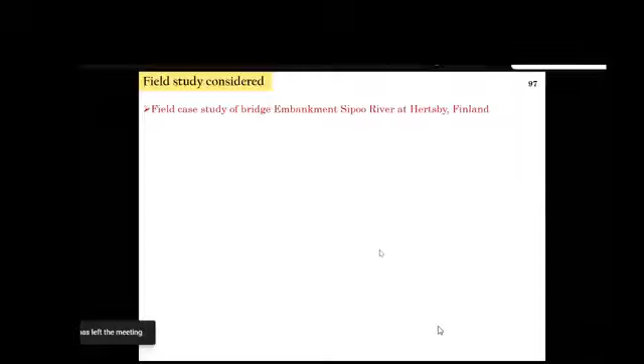Again, since these tests were limited to direct shear boxes, we augmented that to a field case as well. Not that field tests were done, but a literature survey was carried out, and based on validated literature, a model was developed which is not based on the direct shear test. The data from published literature was used to simulate a numerical model like this.

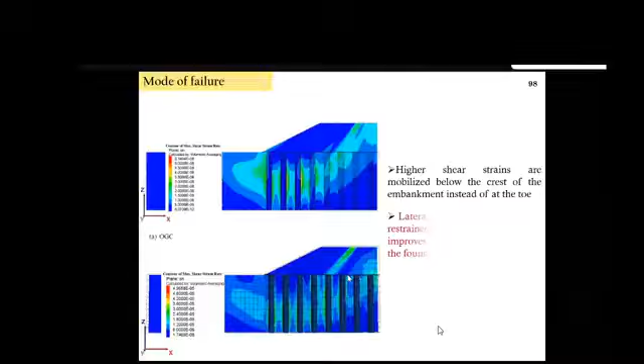Higher shear strains are mobilized below the crest of the embankment instead of at the toe. Lateral soil movements are restrained by the EGC, which improves the bearing capacity of the foundation soil. Again, it's an advantage—we don't want the soil to get damaged; we want the loads to be taken by the stone column.

So there's obviously a reduction in settlement of the embankment. Since the embankment foundation soil is not deforming, this gets reflected in the embankment as well. Had the foundation soil deformed or been under stress, the embankment would obviously settle. In this case, since you don't have that, the settlement is minimum.

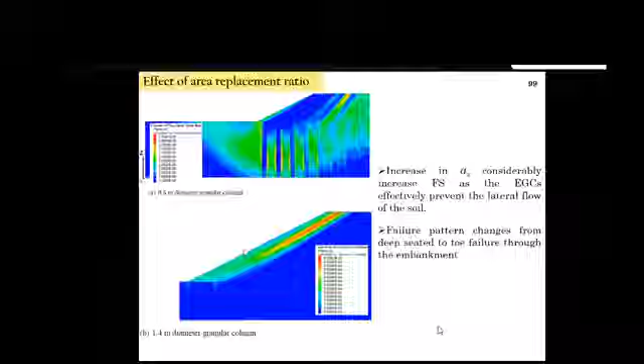Now, the failure pattern, like I said, you can see from the picture, it changes from a deep-seated failure to a failure that passes to the toe through the embankment. So you don't have the risk of the foundation soil failing. If there's any failure, that's limited to the embankment, which we can, at least to a certain extent, repair and replace.

Now, the installation pattern: triangular pattern is shown at the top with a square pattern at the bottom. The triangular pattern has an area replacement ratio of 9.42, whereas the square pattern at the bottom shows a 12.56 area replacement ratio. It was found that square arrangement gave a higher factor of safety compared to triangular arrangement for both OGCs and EGCs. That's quite intuitive because when you compare the area replacement ratio, square has a higher ratio, so it's reflected in the factor of safety as well.

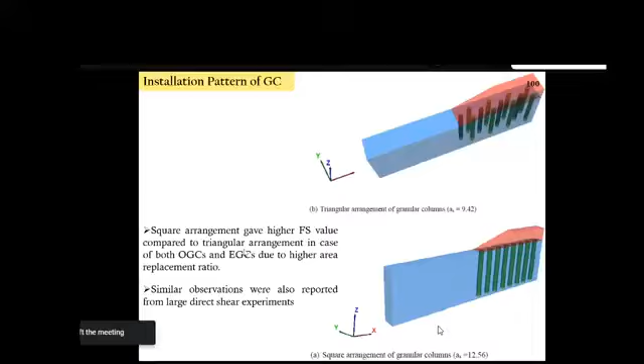So the factor of safety reduces considerably with reduction in length, meaning it increases with an increase in the length of the column. That's a reflection based on the previous slide, quite intuitive. When you have a longer column, it's positioned such that the failure surface passes through that column. Whereas with a short column, the failure surface would probably pass below it, so it doesn't matter even if there's a column above that. It's better to have a designed longer column to achieve a higher factor of safety.

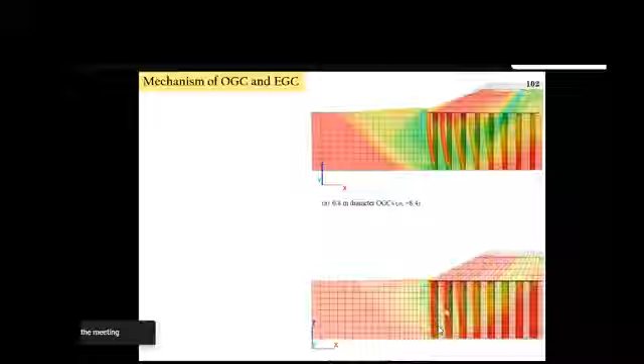When you replace it with a bigger diameter stone column, you get a different pattern here as well, trying to restrict the failure to the top level. So the granular column at the toe undergoes higher lateral movement compared to the columns at the center, which are subjected to compressive loading and are expected to bulge out. At the toe, you don't expect it to bulge out; instead, it tends to bend, just like the long column.

The second mechanism observation is that encasement of the granular column has increased the stiffness, thus attracting larger forces. We've already discussed this: when you encase a stone column, it attracts the stresses, keeping the soil safe. This is beneficial as a larger percentage of embankment loads transfer to the granular column, thus reducing the overall stresses on the foundation soil.

Some conclusions based on the second part: stiffer geosynthetic materials help reduce the chance of deep-seated failure and keep the foundation soil safe. Second, when you use a granular column, you can reduce the stresses transferred to the foundation soil, reducing soil foundation pressures and attracting stresses to the stone columns. I'd also say that a granular column aids the consolidation settlement as well.

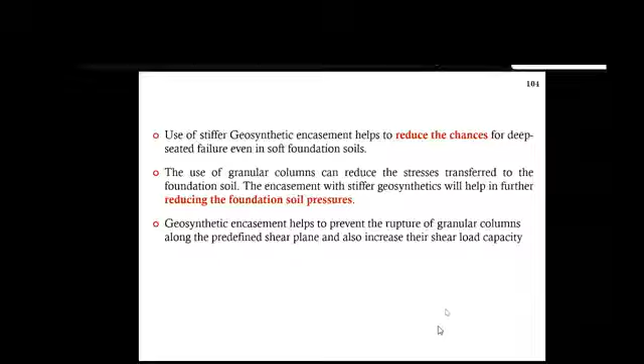Third observation: geosynthetic encasement helps prevent rupture of the granular columns along the predefined shear plane, which you might have seen in the comparison between type 1 and type 2 failure. In type 1 failure, it tries to shear off along the predetermined failure direction, whereas in type 2, with encasement, it offers resistance against the shearing off. So that's another advantage.

So for those who have not been following up till now, these are the potential takeaways from the talk, and those who are sleeping can wake up. I used to have this slide just to summarize everything: you identify a problem, and you understand the mechanism.

Once you identify the problem and understand the basic mechanism, you grasp the theory behind it. You try to play around with different solutions, think of different perspectives at which the problem can be solved, and come up with one such solution or method. You conduct research on it with whatever little resources you have, refine it, and arrive at a solution.

For instance, when you identify a problem at Cochin Marine Clay, you understand the mechanism, which is that the clay will have a cohesion of let's say 20-30 kPa. You grasp the theory, meaning you understand that to get the advantage out of that cohesive strength, you think about the alpha term. If it's pile to soil interaction, alpha is less than 1, say 0.6, whereas if it's soil to soil interaction, alpha is 1. That's how you identify the theory behind that.

Like I said, it's not completely practical in sand. It's completely practical in clay, because you have to ensure that the cavity created due to the underreaming does not collapse. You can visualize that - you are trying to excavate the soil, and if it's sand, the cavity doesn't stay created. If it's clay, it has a chance of self-standing. So when you can have properly stabilized clay soil with bentonite slurry, you can definitely have that. Of course, it's practiced in India, but I should admit it's not as popular as usual bored cast-in-situ piles. It's in practice.

Next is posted by Ajay Kumar sir: Is it possible to provide underream bulbs in end bearing piles? What will it be? What will be its effect? I'm sorry, I didn't hear what it was. Is it possible to do that in what? Is it possible to provide underreamed bulbs in end bearing piles?

End bearing piles, yes, of course, but it depends on the N value. For an end bearing pile, again, you design it as end bearing if you have, let's say, an N value greater than 15. So if it's rock, definitely not possible. But if you have an end bearing pile designed in such a way that the soil is able to be cut out, it can definitely be possible. But again, it depends on the N value. N value is nothing but the representation of density - it just represents the ability by which you can cut the soil. So it depends on the N value. It can definitely be done.